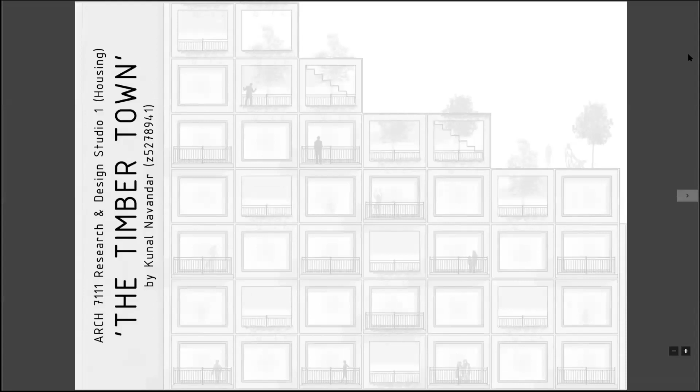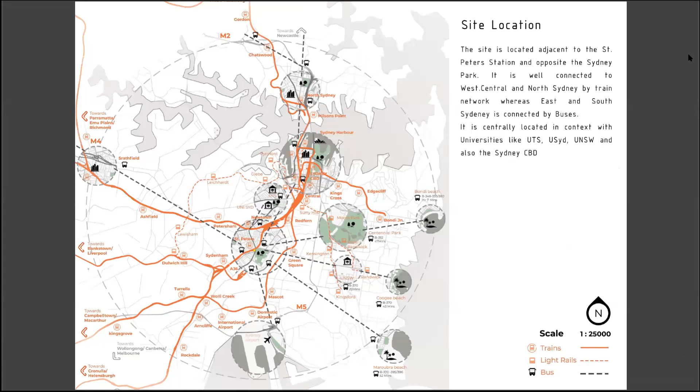Hello everyone. This is a design proposal for 645 King Street known as the Timber Town. The site is located adjacent to the St. Peter's Station and opposite the Sydney Park. It is centrally located in context with universities like UTS, USyd, UNSW and also the CBD.

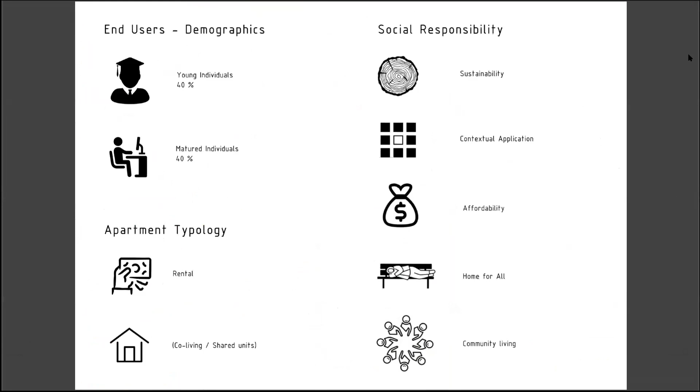As we observe, the demographics around the site suggest 40% of the people are young individuals and 40% are mature individuals. Hence, the proposal is a rental scheme consisting of two-bedroom co-living units. As an architect, other social responsibilities addressed in the project are sustainability, affordability, home for homeless, contextual application, and community living.

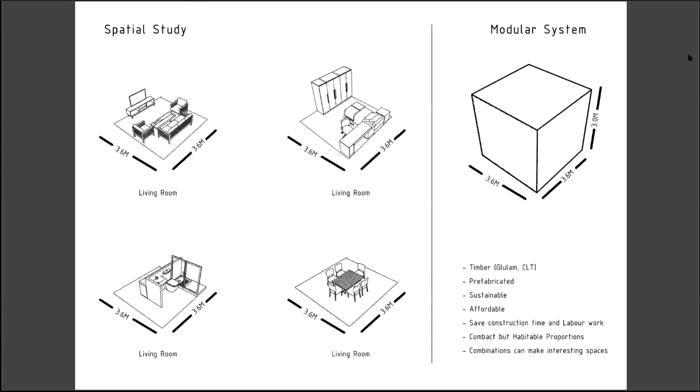The spatial study for the individual encourages a 3.6 by 3.6 modular system which allows us to explore materials like timber, techniques like prefabrication, and hence improve the scope for sustainability and affordability.

As a concept, the site is interpreted as the extension of Sydney Park within the urban fabric. The modular grid is further extruded, creating a perimeter block that surrounds the courtyard. Further, St. Peter's Station encourages a public hotspot opening into the courtyard and allowing public movement through the secondary lanes.

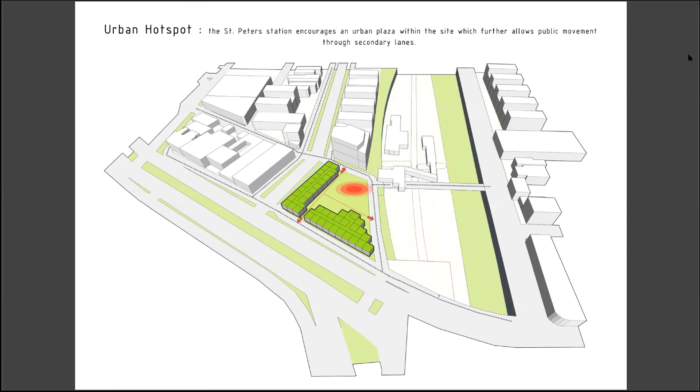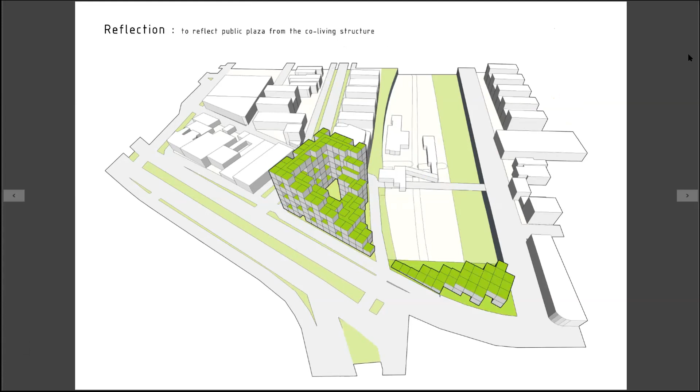The building modules are then stacked as per the grid, and the northeast corner is lowered to achieve maximum north light to the central space. A few modules are subtracted to achieve cross ventilation within the structure, and also the public plaza is extended. The public plaza is extruded to reflect from the co-living structure.

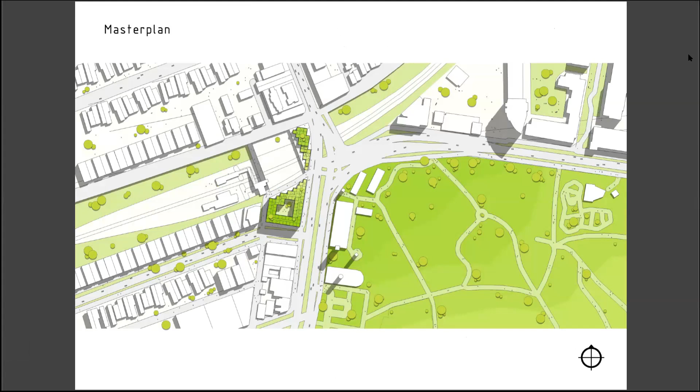The master plan shows how the building is the binding element between the urban fabric and the park. The shared courtyard at the ground level of the building consists of food trucks along with street furniture to activate the entrance to the train station.

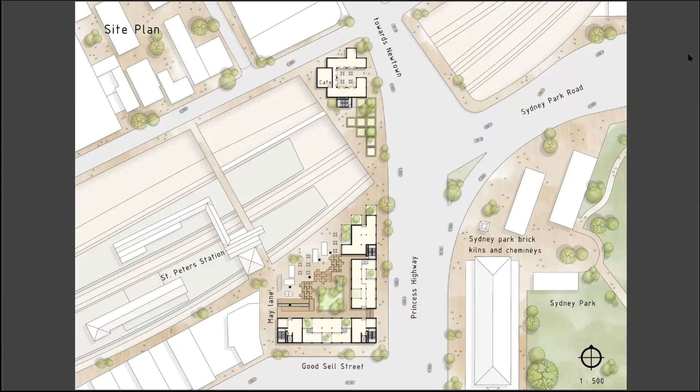An amphitheater blurs the line between the public and the private zone. The plaza comprises a stepped green bed to activate and secure the public entry from the highway. It also has a cafe at the ground level and has 3 units for homeless above the cafe, as we spotted some homeless people at the Sydney Park.

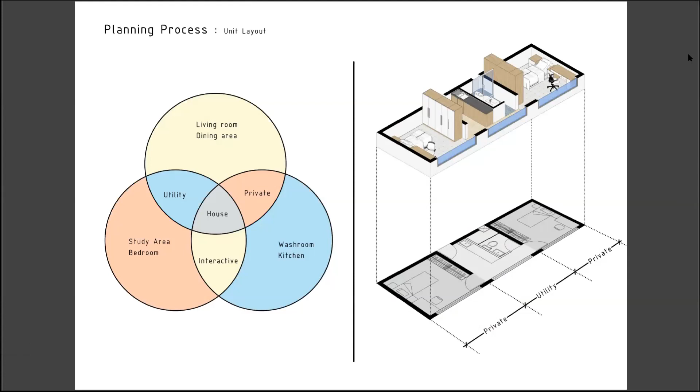A typical home consists of private spaces, interactive spaces, and utilities. As we can observe, the typical unit consists of 2 private bedrooms separated by utilities like the kitchen and the washroom. 3 of such units are placed around the corridor and share interactive spaces like living and dining area to encourage community interaction.

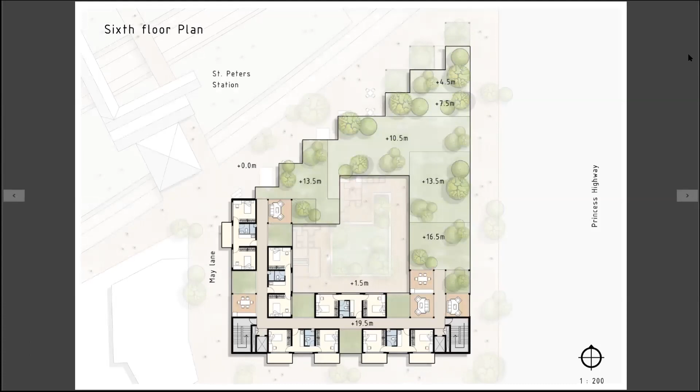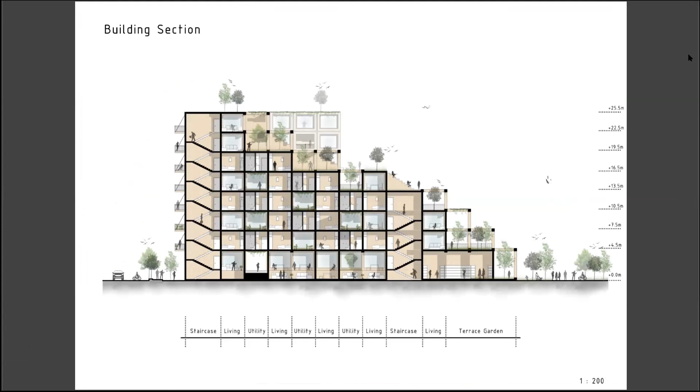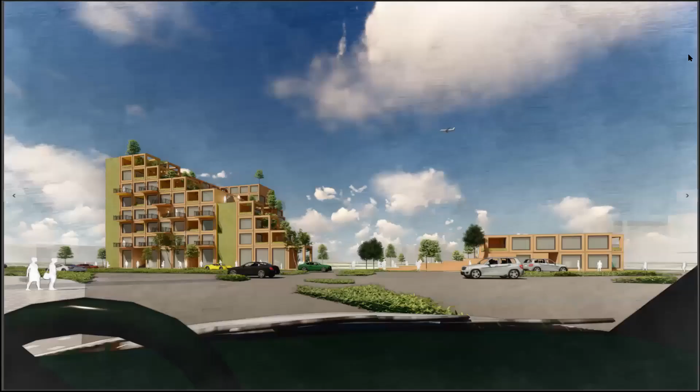The elevation is kept simple to encourage users to add their personalities to this canvas. Green wall is used at the staircase to highlight the timber structure. We can see how the building is an iconic structure at an important junction of the highways. The green walls highlight the timber tone and balconies add character to the structure.

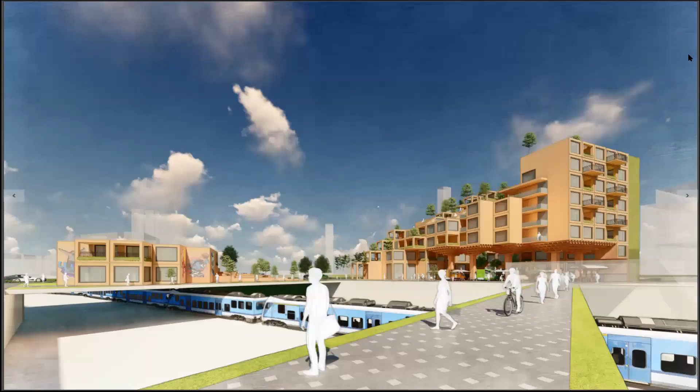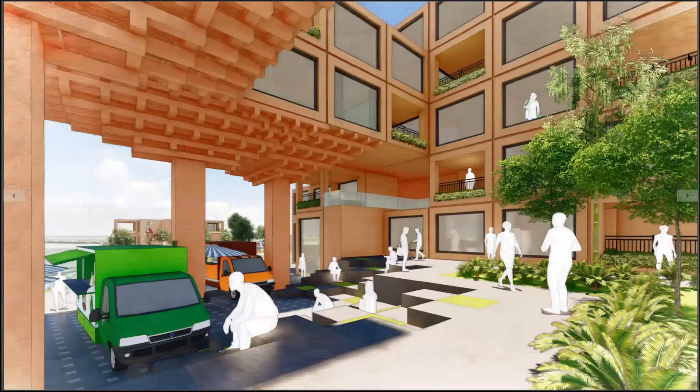The plaza maintains the Newtown elevation, cafe at the bottom and houses at the top. The columns follow the language of the building and also hold the structure. They also draw attention to the shared courtyard and the public space. The food trucks activate the courtyard and the amphitheater acts as the pausing spot in these spaces.

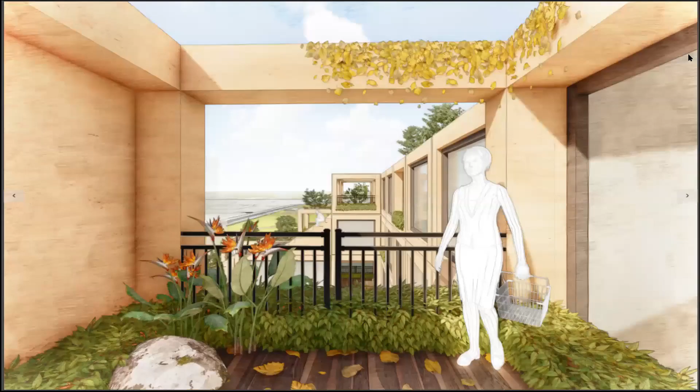The courtyard receives a good amount of light and ventilation, and visual interaction is possible through the terraces overlooking the courtyard. The terrace gardens allow visual connection with Sydney Park. Also, various activities like exercising, reading, and jogging are possible at the interconnected community gardens and roof gardens.

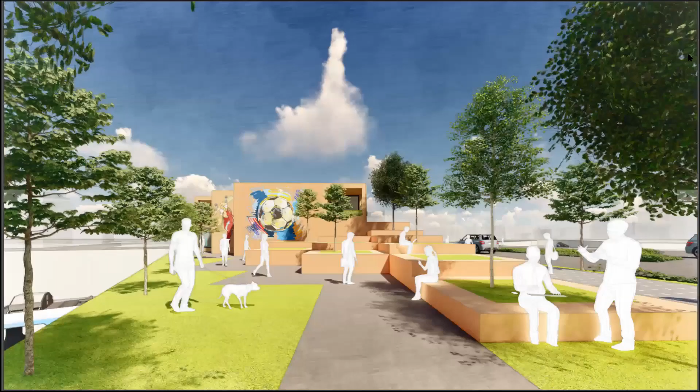The stepped green bed encourages public movement through it and secures the plaza from the highway. Cafe walls are kept blank to acknowledge the local wall artists, as we observed a few graffitis around the site.